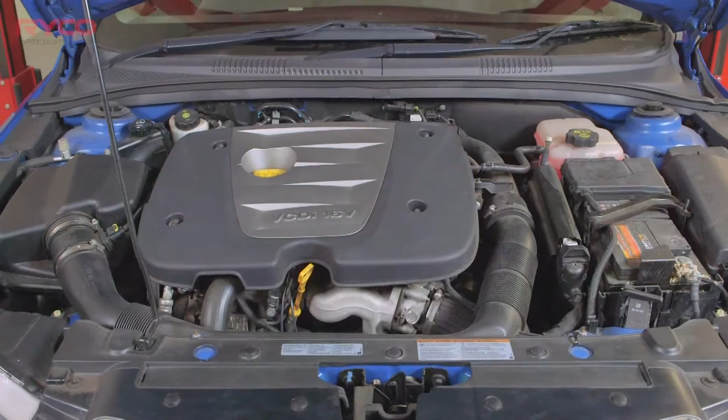Today's light vehicles are designed to offer drivers exceptional performance, respectable fuel economy, the highest levels of passenger comfort and safety, whilst meeting stringent exhaust emission regulations. These vehicles have a vastly different and more complex exhaust emission system compared with an older diesel vehicle.

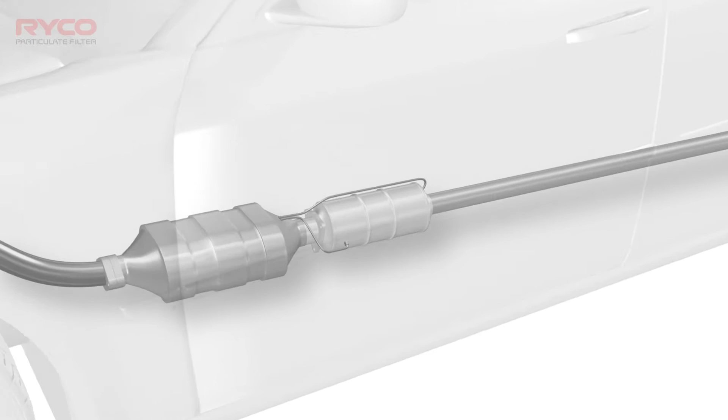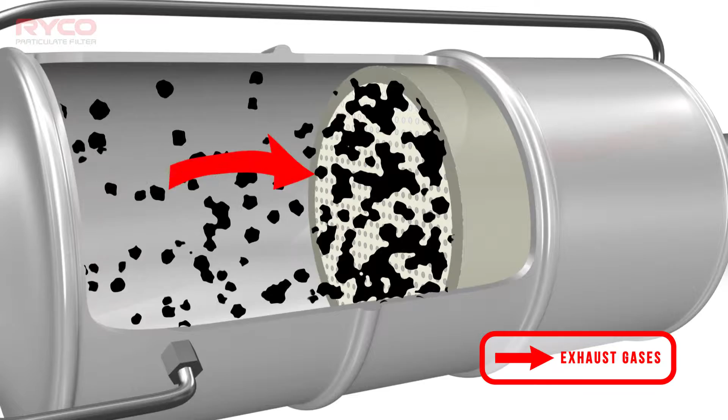A diesel particulate filter, or DPF, is simply a device fitted to the exhaust system designed to filter and trap particulate matter from the expended gases. The DPF has a limited capacity. As it becomes saturated with particulate matter or soot, it begins to restrict the exhaust flow. It's necessary to remove these built-up particles routinely and in a manner that complies with current emission regulations.

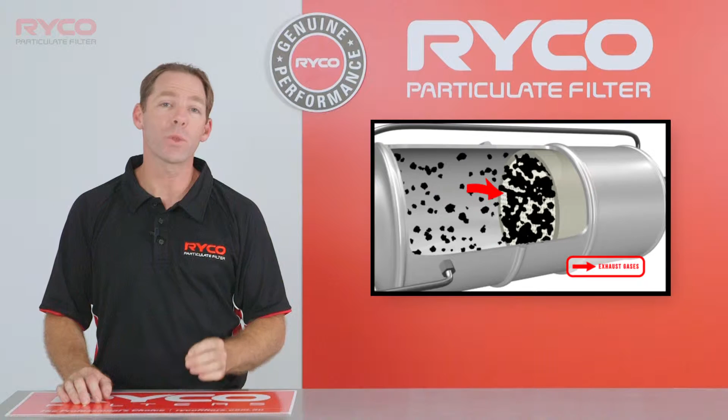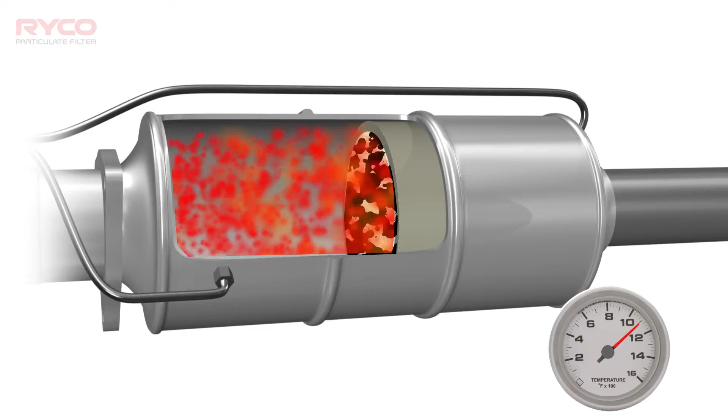The Engine Control Module, or ECM, does this by injecting extra fuel into the combustion chamber during or just after the combustion stroke, increasing the exhaust gas temperature and burning off the trapped particulate matter within the DPF. The DPF assembly may be located up or downstream of a NOx catalyst.

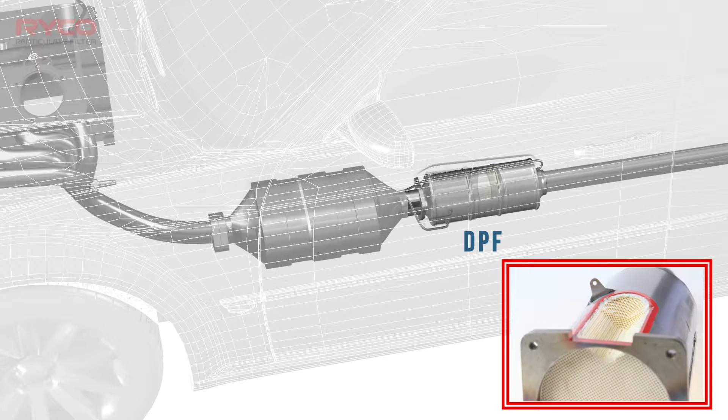The DPF is constructed with a porous ceramic core with alternately closed channels. The soot-enriched exhaust gas flows into the closed channel and is forced through the porous walls and out of the ceramic core. The filtered gas then flows through the rest of the exhaust system, exiting into the atmosphere. The trapped particulate matter is stored in the closed channels on the engine side of the DPF ceramic core.

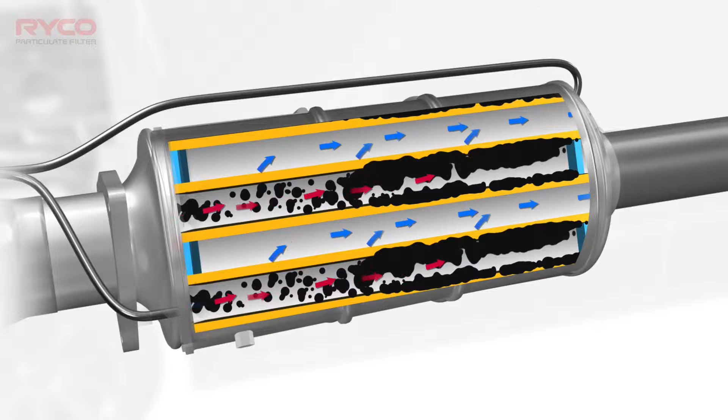The ECM burns off the stored particulate matter by raising the exhaust temperature to over 600 degrees Celsius. Remember, care must be taken when performing repairs on a common rail diesel, or CRD, exhaust system, as the heat generated during a service regeneration can cause serious burns and personal injury.

In order to meet increasingly stringent global emission standards, exhaust gas after treatment requirements will increase significantly for CRD passenger vehicles in the future.

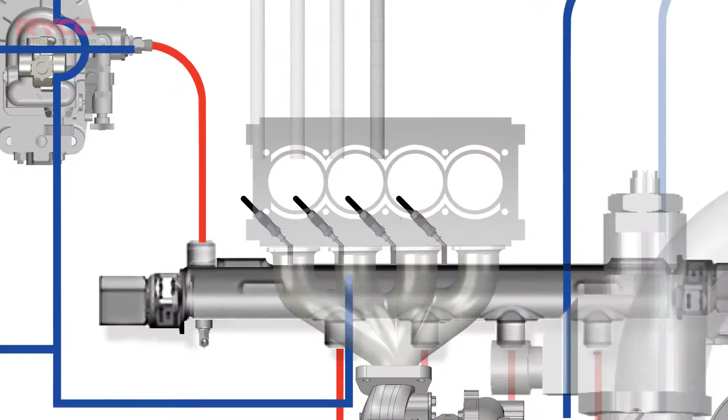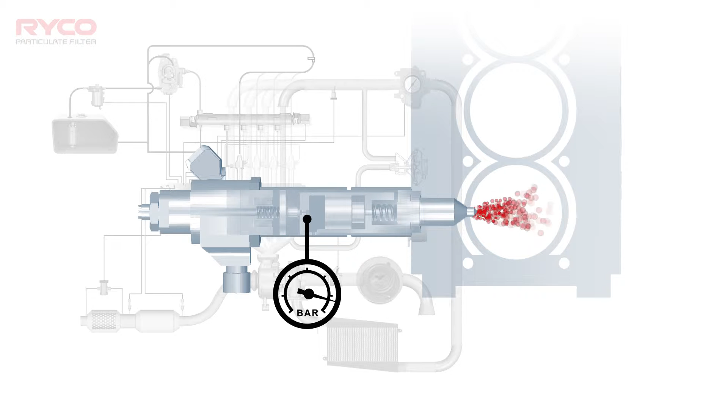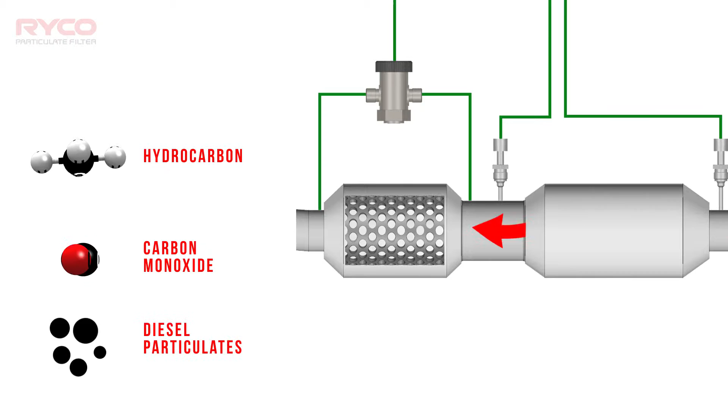Manufacturers are constantly improving CRD injection systems and their electronic control. The performance, fuel economy and emission levels have steadily been improved. Extremely high injection pressures convert diesel fuel via the injector nozzle to vaporised droplets. These are then optimally distributed throughout the combustion chamber. This results in greatly reduced hydrocarbon, carbon monoxide and lower diesel particulates from being produced in the combustion stage.

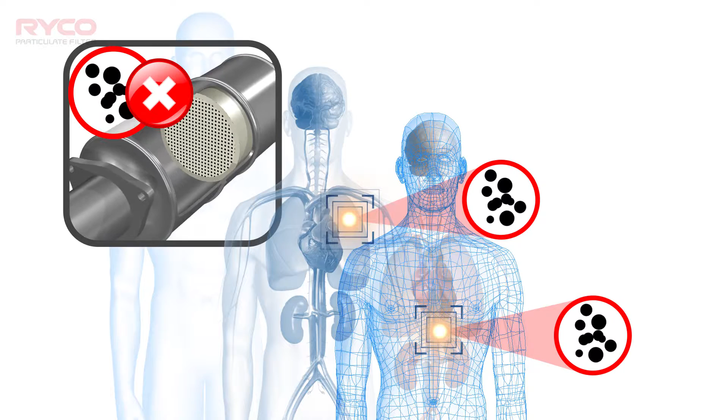The introduction of Euro 5 emission standards has shown that engine modifications alone are no longer sufficient to achieve any further reduction in the diesel particulate emissions. The DPF has now become an integral component of all production CRD light passenger vehicles. The introduction of a DPF is in response to increasingly greater environmental awareness in terms of the impact of diesel particulate matter on the health of human beings.

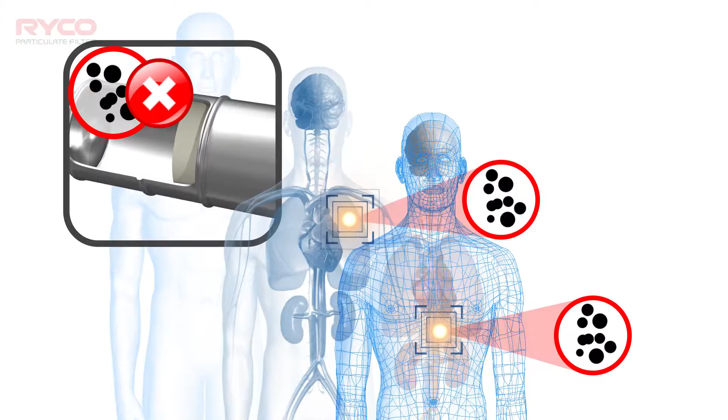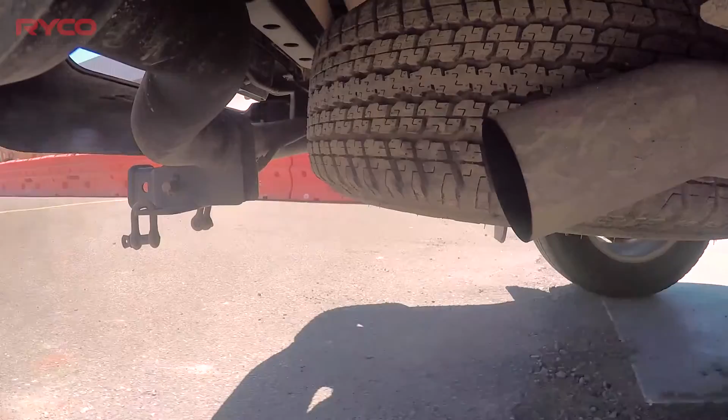Diesel particulates are composed as a chain of carbon particles with a very large specific surface area. The noxious effect of diesel particulate matter is a result of adsorption of unburned or partially burned hydrocarbons. The introduction of DPF enables more than 95% of the diesel particulates to be efficiently removed from the exhaust gas. However, the complete removal of all diesel particulates using conventional methods is just not possible.

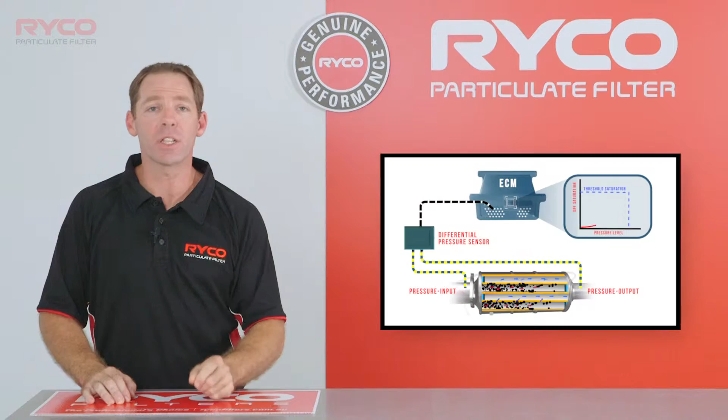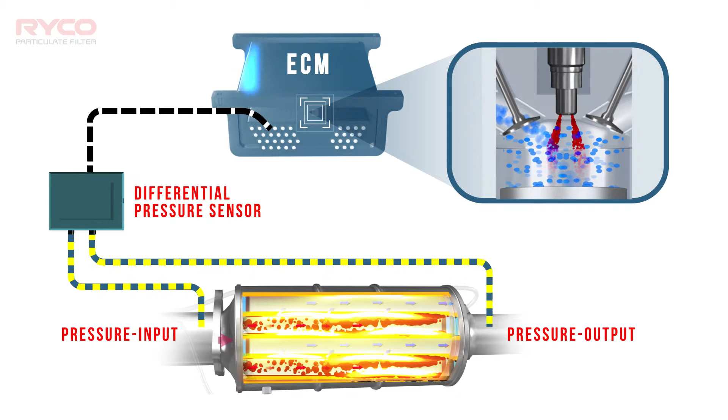The stored particulates must be regularly burnt off in order to prevent blockage of the DPF. The saturation level of the DPF is calculated by the ECM. If it exceeds a certain threshold, the ECM initiates a regeneration or burn-off process by means of fuel enrichment through pre- and/or post-combustion injection events. The additional injection events increase the temperature of the exhaust gases to greater than 600 degrees Celsius.

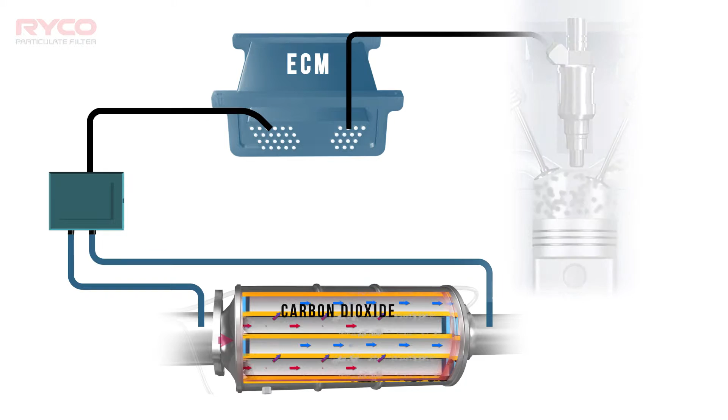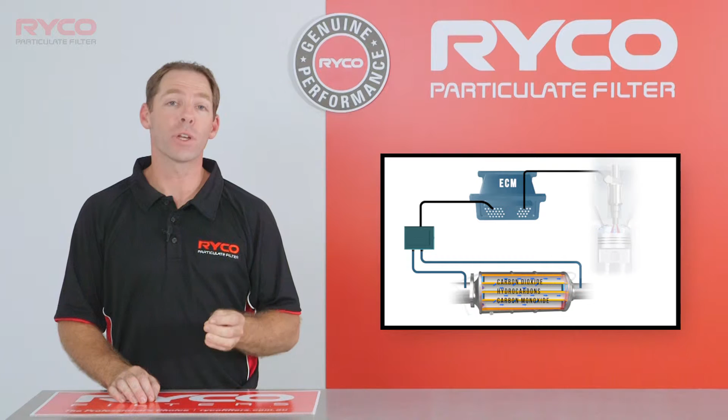In a correctly functioning system, this extreme heat energy converts the carbon deposits or particulates to carbon dioxide and trace amounts of hydrocarbons and carbon monoxide. The engine control module, injectors, exhaust gas temperature and differential pressure sensors are responsible for the control and monitoring of this regeneration process.

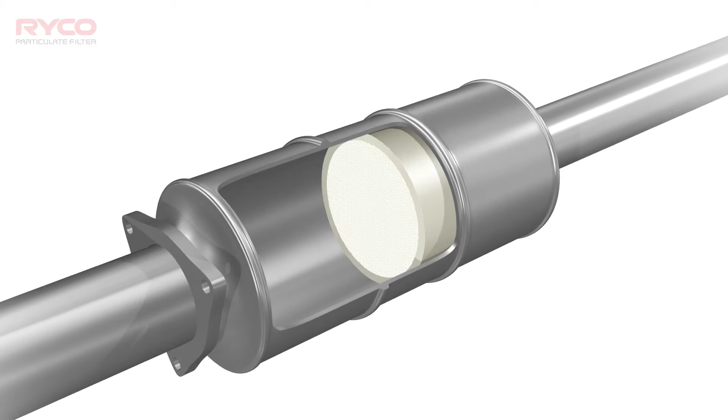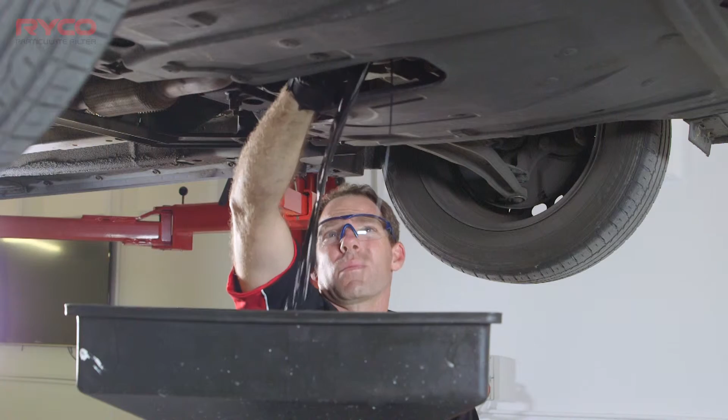There are 3 types of DPF regeneration possible in a CRD passenger vehicle: passive, active, and forced regeneration. Active and forced regenerations can affect the service life of the vehicle's engine oil due to the manner in which these types of regenerations are performed.

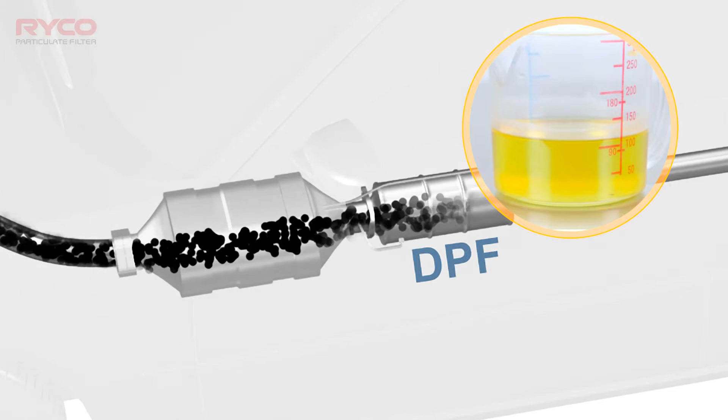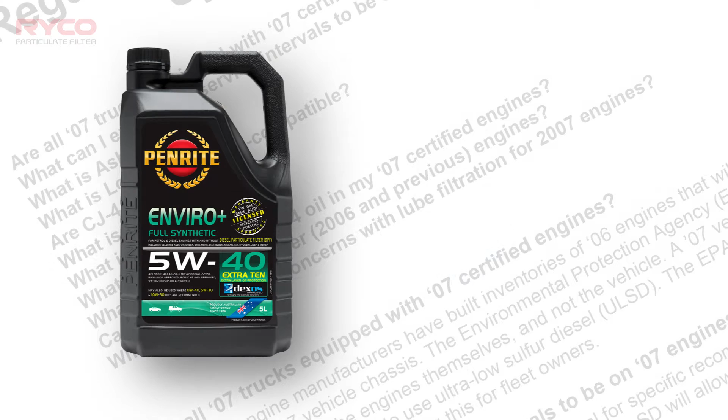Diesel fuel quality impacts heavily on the level of particulates produced by a CRD engine due to high levels of sulfates in some diesel fuels. This results in more frequent regeneration events. Most vehicles fitted with a DPF need a low ash engine oil to help prevent premature blockage of the DPF.

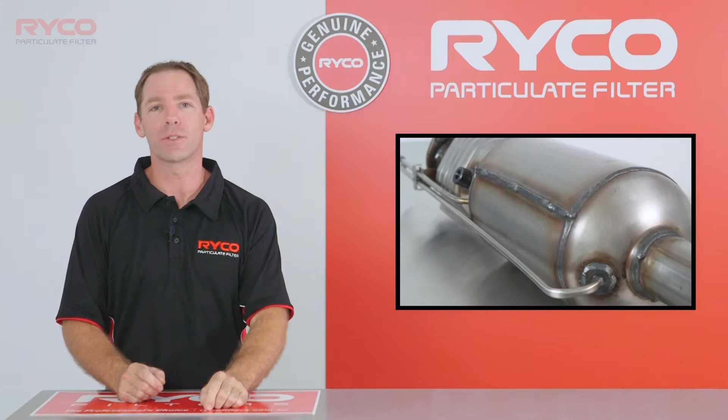Want to know more? We'll have a detailed look at these 3 regeneration processes in the following series of DPF videos. DPFs must be designed to comply with the vehicle manufacturer's specifications.

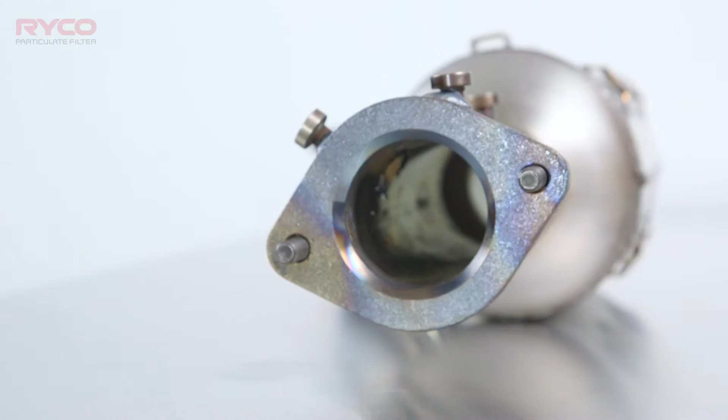When a workshop makes the decision to purchase an aftermarket DPF, they must ensure it meets the vehicle manufacturer requirements and not risk voiding the vehicle warranty.

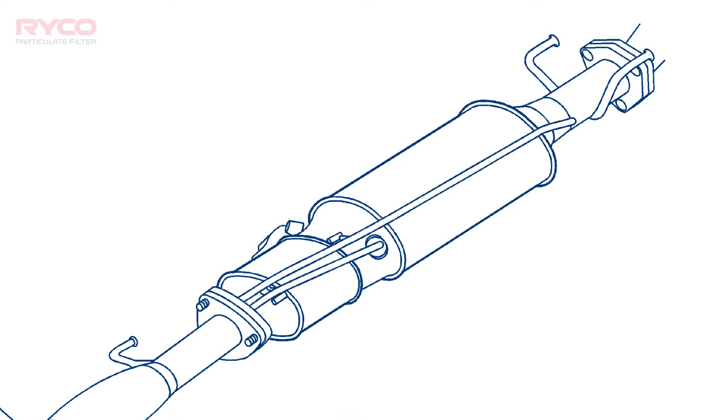When purchasing a replacement DPF, several factors must be considered. The substrate size must be compatible to the engine capacity without causing a reduction in engine performance. We match the exhaust pipe diameter with the original equipment manufacturer. A smaller diameter pipe to OEM results in a back pressure increase, which may affect engine performance and illuminate the DPF warning light, or even enter a reduced power mode.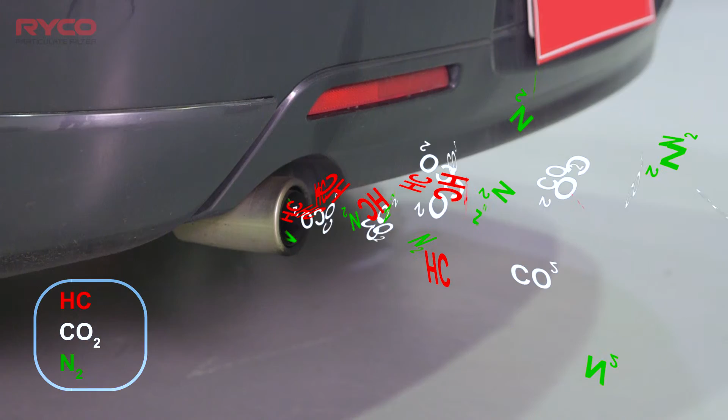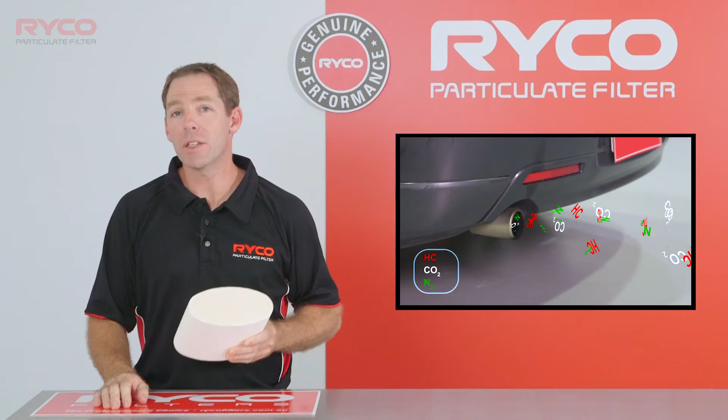Failure to use an approved DPF will often result in exhaust tailpipe emissions not meeting vehicle manufacturer compliance, which may result in environmental penalties. So now, we have a reasonable understanding of a diesel particulate filter's purpose, construction, location on a vehicle, and its functionality in reducing tailpipe emissions.

If there is any part of this video you are unsure of, please review it again. It's important that you have an understanding of a diesel vehicle's engine management system's control of exhaust tailpipe emissions.